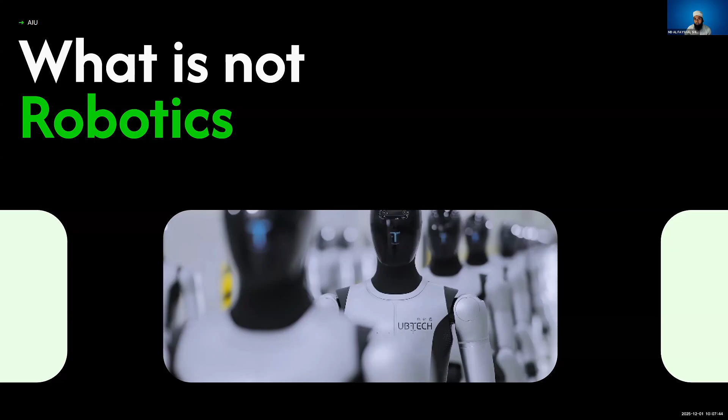So to know how I can share about robotics, you guys need to know a little bit about what I've been doing for the last decade. I was studying at Swinburne University of Technology in Australia, in robotics and mechatronics. From that time to now, it's been almost 9 to 10 years. The first 4 years was me learning, and for the last 5 to 6 years I've been applying what I learned into the real industry.

For the first 3 years, I was freelancing on one of the top platforms on the internet, Upwork. After doing well there, I transitioned to entrepreneurship and started my own startup in the last 3 years. I've been running it, and right now I have a team of at least 10 people. Later you guys can check out my website.

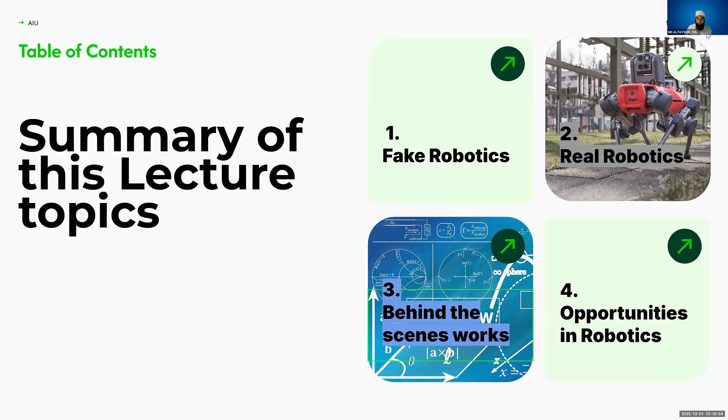So now we can start with the first slide. Most people on the internet are teaching that robotics is a really easy thing. What they're showing is that you just attach a battery to a motor, or some lights or a fan, and there you have a robot. It can be a robot for a different age group—maybe for a 4-year-old this can be robotics, but in truth, that's not robotics in total.

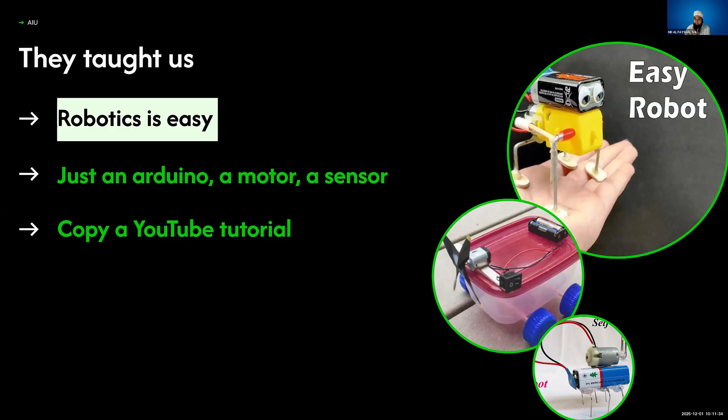There's another misconception that you have an Arduino, a motor and a sensor, and there you go, you have a robot already. Right now there are even universities where students get these kinds of projects, and after achieving one, they think they've already built a really big robotics system. But in reality, it's not.

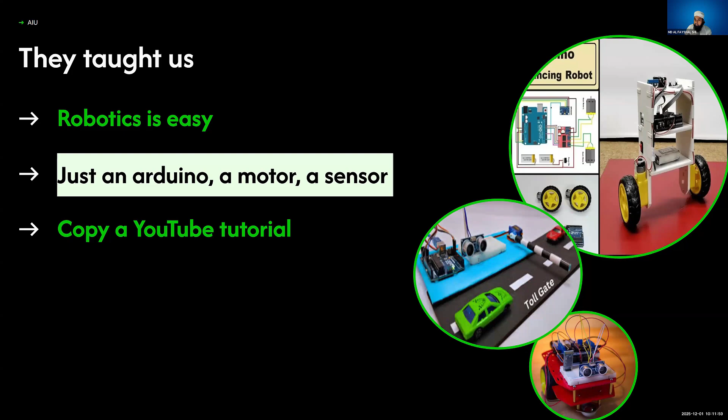Also, there are a lot of YouTube videos available right now, and some people watch this video, and within 2 days they can build what has been taught in the YouTube video.

We almost forget every time that what has been done in that YouTube video was maybe a year-long work, and they simplified it and brought it into YouTube so you guys can do it within 2 days. But that's not going to give us leverage in the robotics business. That might give the YouTuber leverage, but not the viewers.

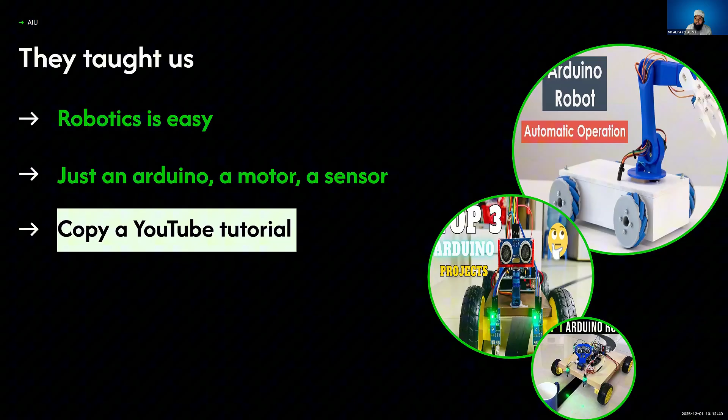So for the viewers, I want to share what actual robotics looks like. This is one scenario, two robots working together. On the left we have two robots, and one of the robots has two arms attached to it, like two hands, and those two hands are catching one bag. Here the robot is using computer vision and also precise grasping ability.

The gripper needs to have precise ability to grasp the bag because the bag is not a solid structure. On the right hand side, you can see the robot trying to flatten and fold a cloth. These tasks may be really easy for a human being, but for a robot, it's really difficult.

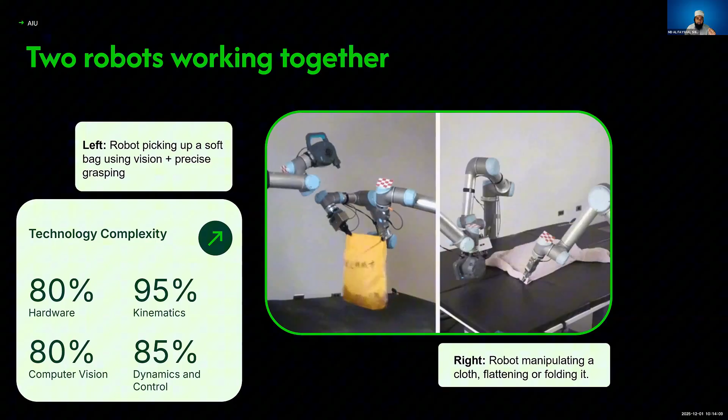On the left I showed some comparison of what kind of technologies are used here, and what complexity of hardware, kinematics, computer vision, and dynamics and control has been done to achieve this feat. If you note that, in the next slides it will just increase significantly. The hardware complexity will change over here, it's almost 95 now. The kinematics has reduced a bit, and the computer vision also reduced, but the hardware has been really complexly done over here.

Watching the video, you'll understand why I'm saying the hardware design is complex. This is not just a normal Roomba robot, or like the factory cleaning robots we know. This one was like a concept at first, and some companies right now are trying to make this thing work. If they want to climb stairs, it can be easily achieved using this kind of mechanism. The work done on the hardware side and the mechanical side of it is really huge, you can say.

So I wrote two or three notes over here. This kind of robot has to navigate the whole house, and that's a really big challenge a robot needs to understand. It's not randomly navigating, it has to be planned navigation so that we don't consume that much battery. So the battery consumption is very efficient.

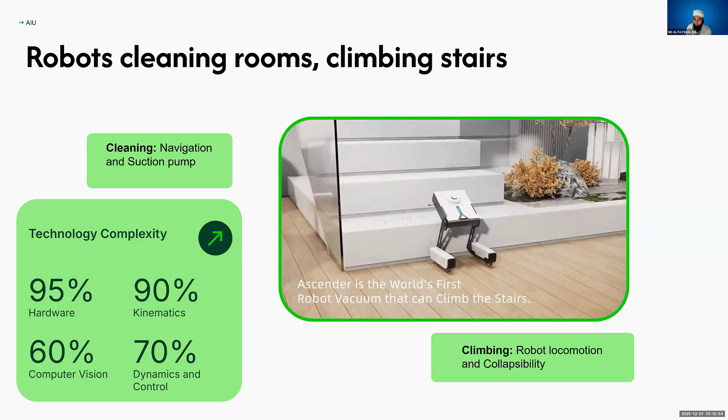When it navigates throughout the whole house, it also needs to store data on where in the house it has the maximum amount of dust and waste. So gradually the robot only goes and spends most of its time on those places rather than the whole house. Like even for our human brains, when we try to understand which part of our rooms are really dusty, we register in our mind that we will go there, and if we clean it, the whole house will be cleaned like 90%. So that has to be fed into the robots by AI and data science.

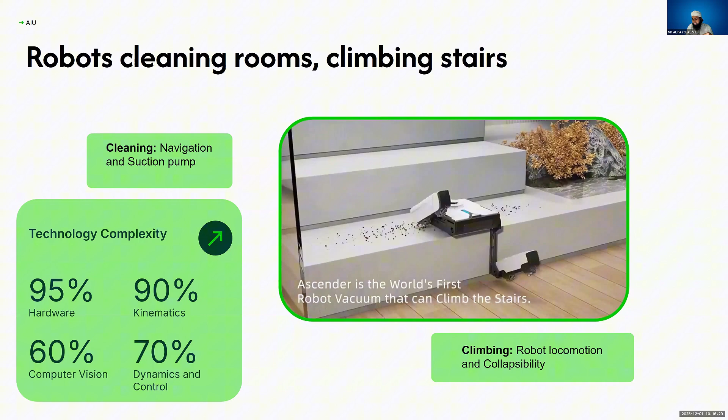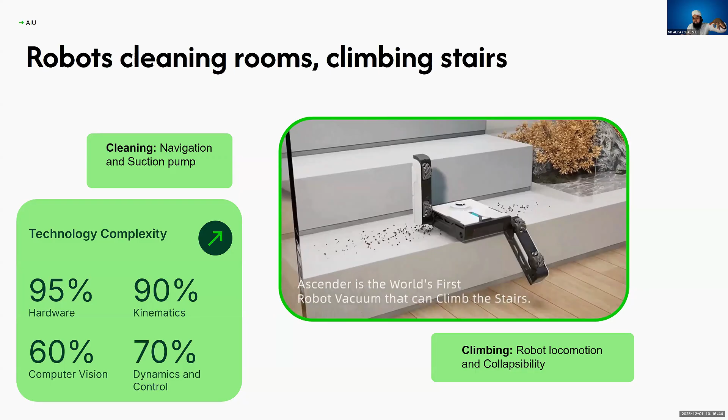For the climbing, you can see that the robot locomotion, the movement of the robot, is really complex over here. A lot of linkage design has to be done for that. It's really collapsible, you can see it's still the size of the Roomba robot, but when it's doing the task, it's trying to be like a giant robot, but in reality it's again collapsing to the original shape.

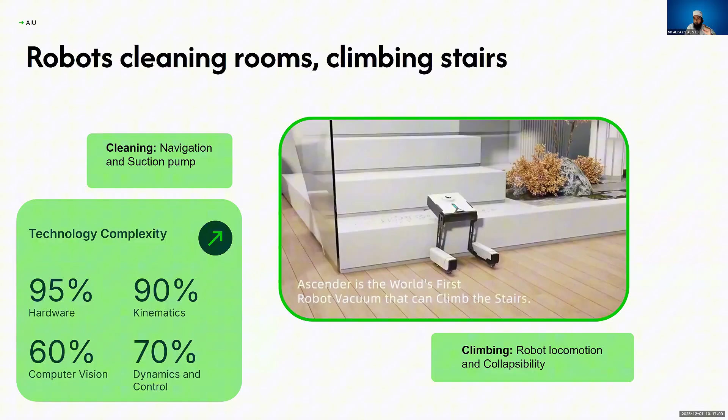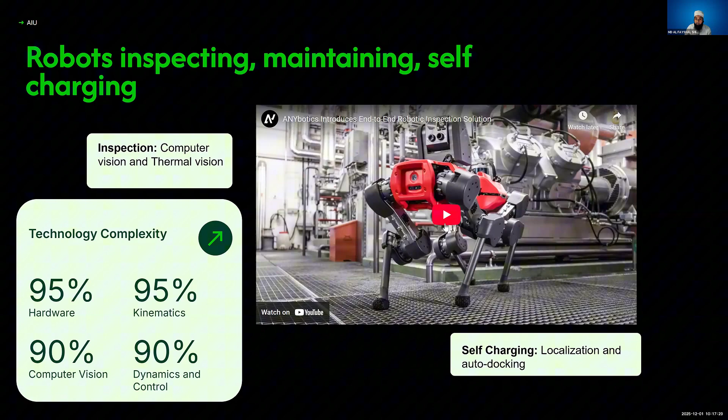The second thing I want to show is about the robot dog. This kind of quadruped robot with four legs is usually called a quadruped robot. In the previous slide, those were moving by wheels, which is really easy to move, but when we're trying to move by legs, it becomes too much high complexity. That's why in dynamics and control, almost 90% of the work has to be done. And here, localization means the robot should always know where it is, and it should go back to its place for self-charging.

I'll just play the video shortly so that while I talk, you can understand how complex tasks this robot can do.

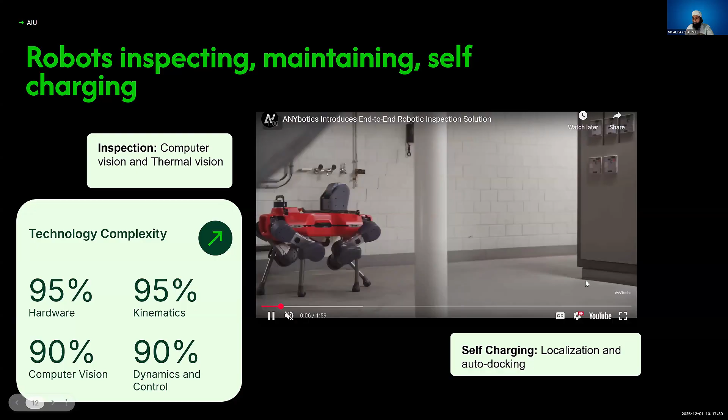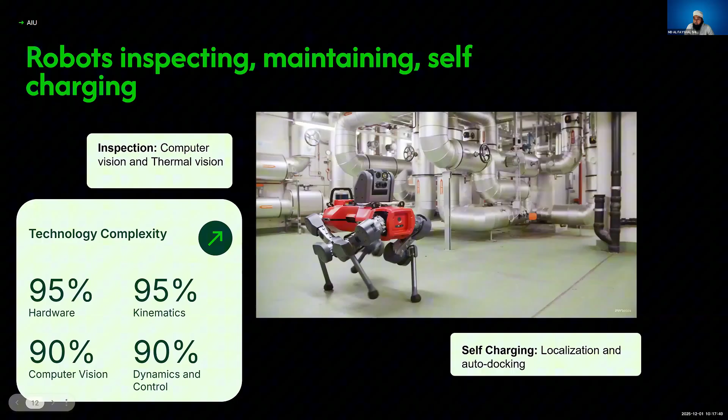Usually, this robot is planned to be used in industries where human inspection is obviously not enough.

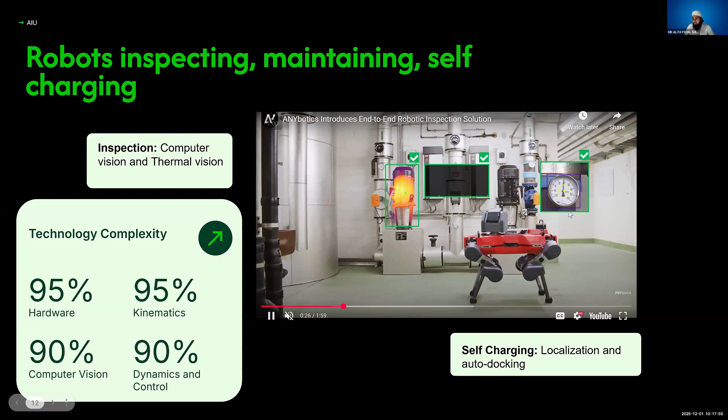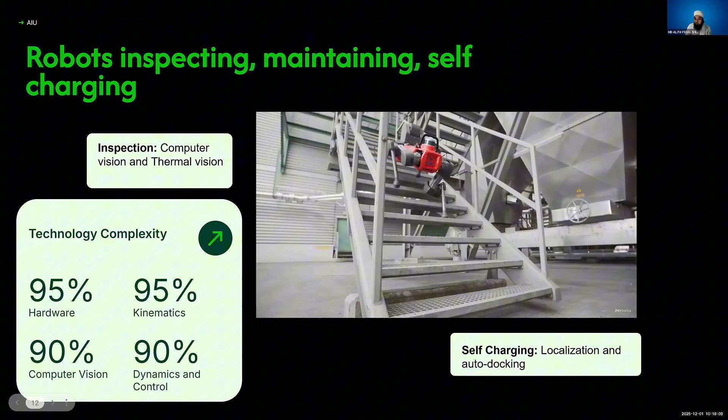This kind of robot can see, you just saw it has heat vision and it's checking if everything is correctly placed or not. If there is something wrong, then it can send a signal back to people within the premises, and they will come check and maintain the hardware.

You've seen it can also maneuver the stairs easily. For the previous robot, it was really difficult to maneuver the stairs, right? But for this robot, it's nothing. So some robots get an advantage in some areas, while other robots get an advantage in other areas.

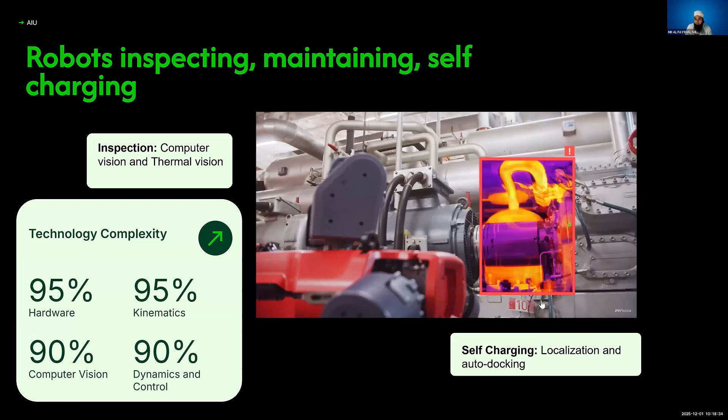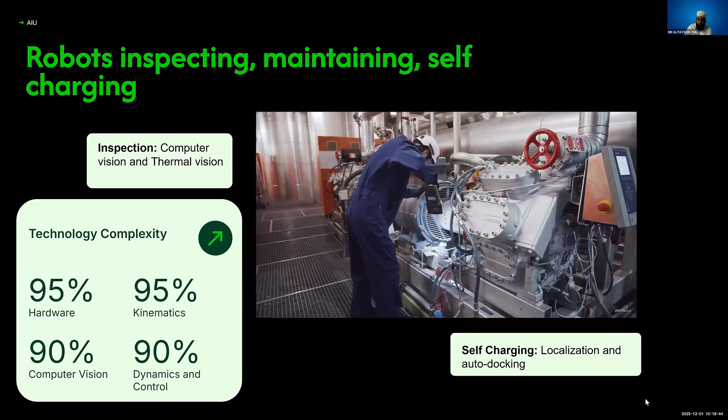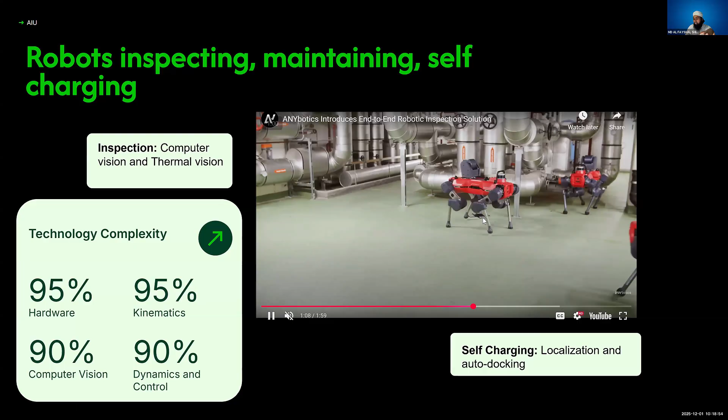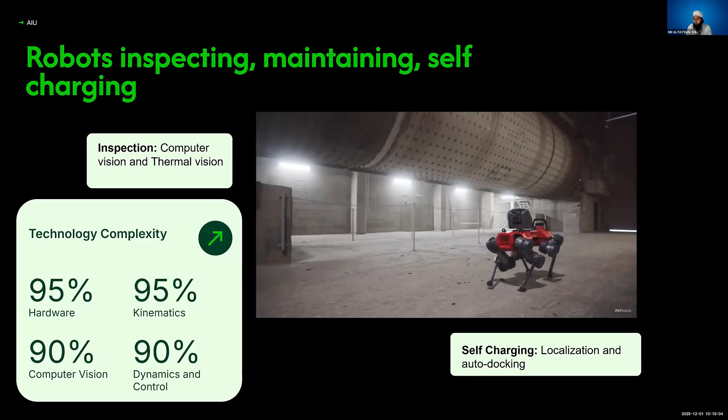Here you can see these robots coming back and trying to self-charge. This is like a docking station. After they are self-charged, they go back again and work endlessly, which a human being will not be able to do. In countries where there is a human worker shortage, they will try to utilize robotics more than anything.

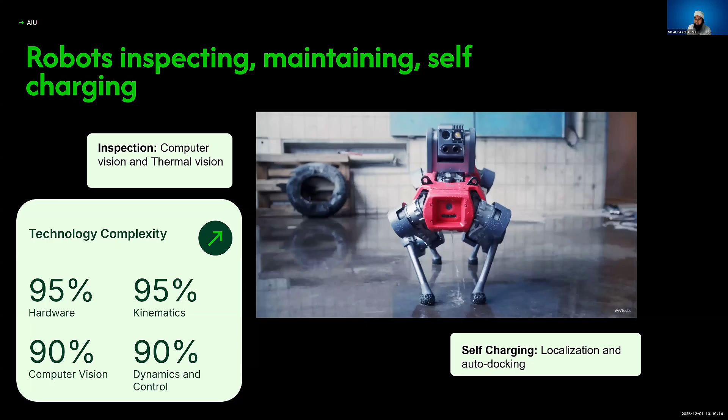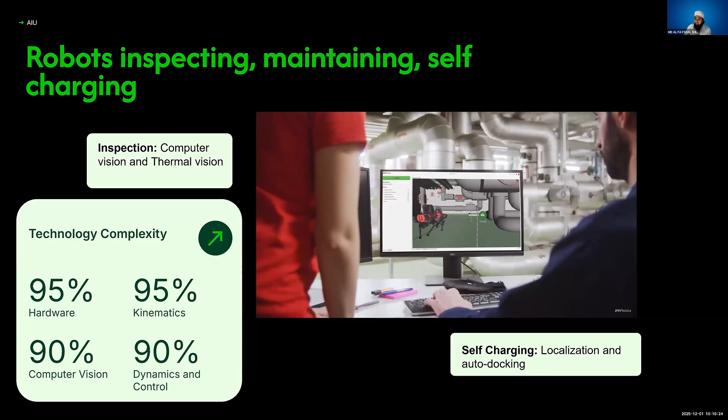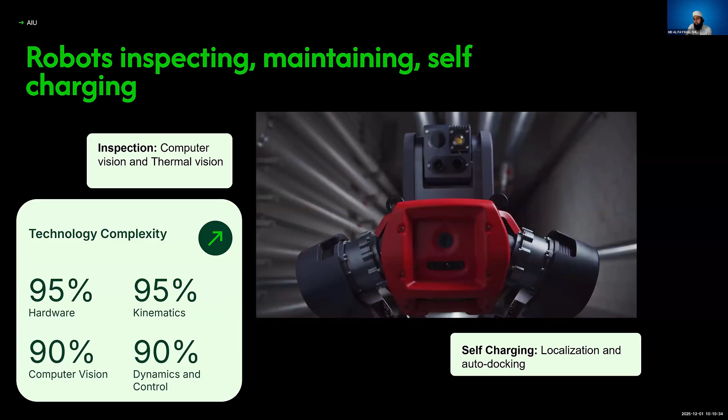There are even other benefits, like these robots can give real-time data, and that data isn't just given, it's directly stored. Over months and years of knowledge, the industry will learn what problems we are facing daily and how we should change our engines or our whole machines so that we don't get these kinds of problems again. A human being might register that, but we don't necessarily understand the long term game of the whole industry.

That's why we fail to register things, and we don't usually give that much feedback. But the robot will give continuous feedback.

Right now, what we do with ChatGPT is just talk with it and try to get some advice from it. But in the future, when robotics merges with these AIs, the robots will try to understand what we are saying to them, and they will try to do the task with those prompts.

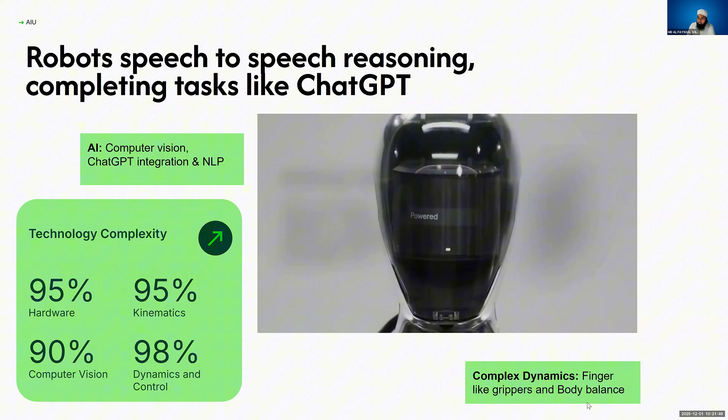Hey, Figure One, what do you see right now? Thank you. I see a red apple on a plate in the center of the table, a drying rack with cups and a plate, and you standing nearby with your hand on the table. Great, can I have something to eat? Sure thing.

Great, can you explain why you did what you just did while you pick up this trash? On it. So I gave you the apple because it's the only edible item I could provide you with from the table.

Great, so based on the scene right now, where do you think the dishes in front of you go next? The dishes on the table, like that plate and cup, are likely to go into the drying rack next. Great, can you put them there? Of course.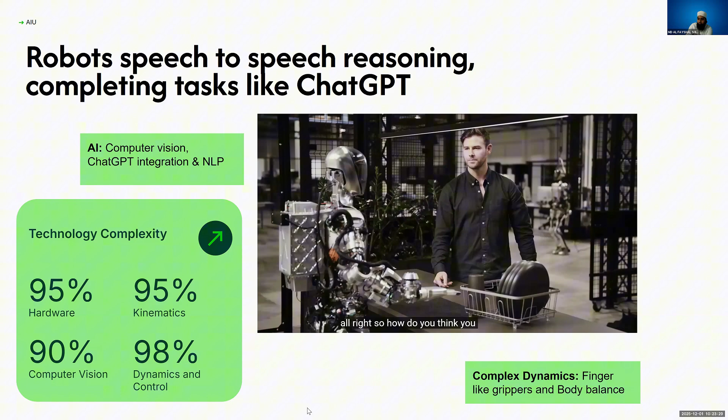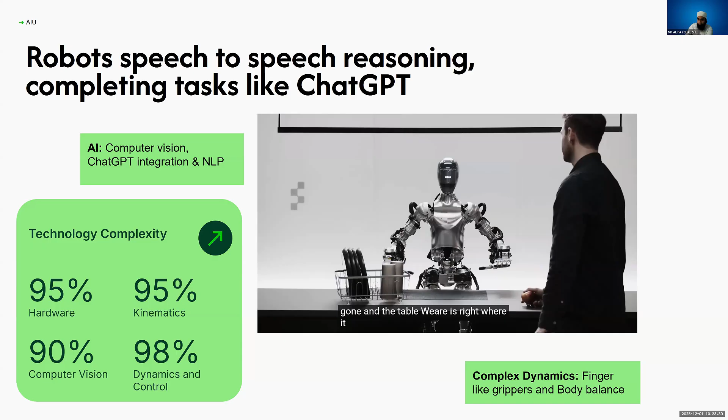So, how do you think you did? I think I did pretty well. The apple found its new owner, the trash is gone, and the tableware is right where it belongs. I agree. Thanks, figure one. You're welcome. If there's anything else you need help with, just let me know.

This video will give everyone a bit of understanding of what kind of complex works can be achieved by robotics. Although robotics is not that easy, that's why robotics researchers always say it's taking more time to bring robotics to the stage where everyone wants.

But for AI, it was really easy. AI is working itself to develop its generative ability, meaning AI is working to make itself better. But robots can't do that because they're physical and have a lot of physical constraints.

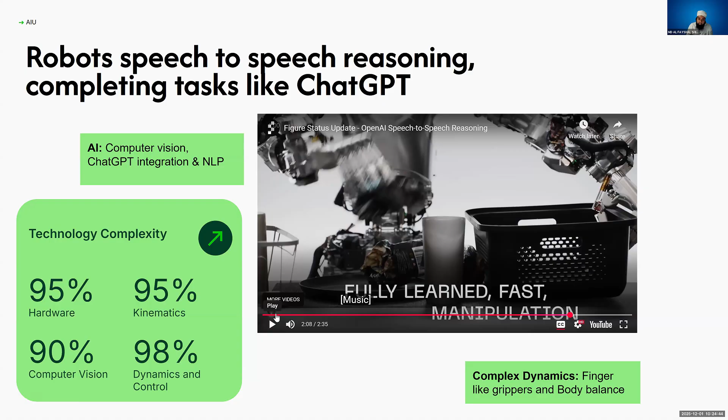So there are a lot of things we need to take care of if we're trying to develop a robot. Just like this robot, there are a lot of different robots that will be developed within the next 10 years, and robots will get into our lives just like smartphones did.

It's a very big bet that a lot of people are taking, for the reason that robotics will become cheaper. That means getting or buying a robot will become more affordable, and people will start buying robots more. These robots can solve a lot of general tasks that we usually need a person to do.

Obviously, that's a question then - what will people do if all of our work has been done by robots? So there are a lot of debates going on around this fact, what we will do if everything has been done by robots.

For years, we've been getting the same answer: we'll do more engaging activities, or activities that make us more delighted and thrilled, and we'll do things that matter the most. We'll spend more time with our families and work a little less. But I don't know, that's what I've been hearing, but it's very hard to predict the future.

Right now, if you see how we're using smartphones, smartphones can do a lot of things, but it's very hard to say that smartphones have 100% made our life easier. On one end, it's making life easier. On another end, it's making a lot of things more difficult.

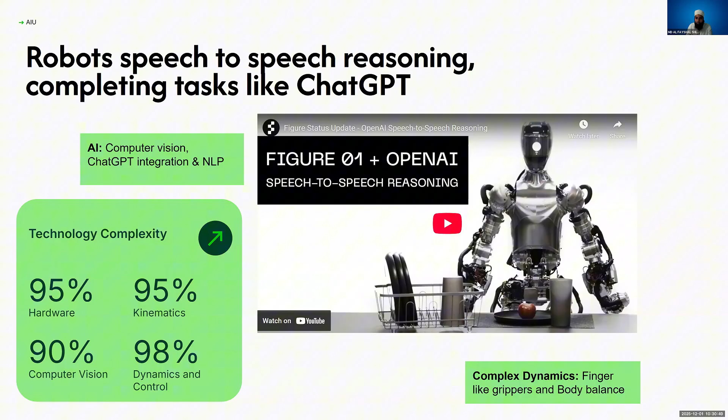So the third thing, a very big challenge, is sensor reliability. What is a sensor? We have a lot of sensors in our human body. We can sense touch, we can sense if there's anything in front of us - that means our vision is also one kind of sensing machine. When we taste something with our tongue, we can understand its taste - that's also a kind of sensing machine. There are a lot of sensors.

Remember, when we have a fever, it's very hard for us to understand if something tastes really good. You can understand that when we are sick, we are not able to tell if a dish tastes really well or if it's tasting a bit bitter, because at that time our tongue sensors aren't working. In the same way, if one of the sensors of a robot goes wrong, the whole robot will have different actions for different kinds of prompts. That means I will ask it to fetch the apple, but it will fetch me a ball. So that's why sensor reliability is very important.

The last thing, since we're talking about hardware - cable routing is a really big problem, because even in our small offices, if we have cables laying around us, we feel really annoyed. So we try to manage those cables, try to hide them so we don't feel overwhelmed. In robots, that's also a really big problem because a lot of sensors, motors, and power supplies are used. While giving all these connections, we need to make sure we can hide these cables so we don't see the ugly parts of robotics hardware.

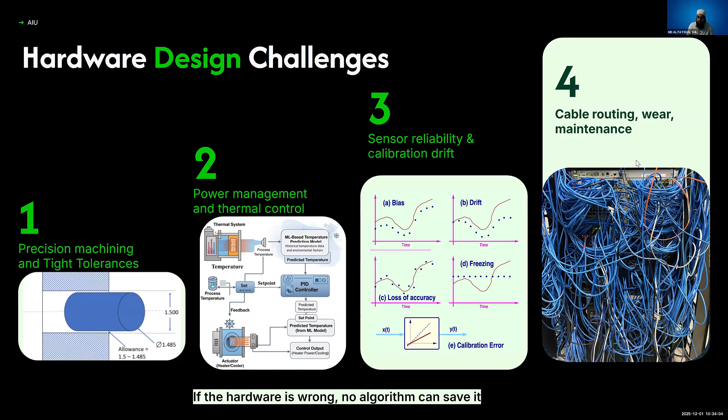So the next slide is kinematics and mathematics challenge. Now here things get more academic, and that's why people actually need a really big degree to be an engineer, where they need to start from engineering maths, trying to understand the mathematical complexity of each machine.

And since these machines are moving machines, it's not like a static machine, there is a lot of motion tracking needs to be there while we are just calculating with mathematical equations.

So one of the most difficult parts over here is what we call inverse kinematics. When we were in our third year, I remember that was one of the most challenging things, and we somehow passed that subject because it had a lot of complex maths and also dynamics and mechanics.

included within robotics, and so we faced a really big challenge over there. So the first one, what I am saying is inverse kinematics, what does it actually mean? Let's say this is my hand, and this hand is a robotic arm. And if I try to pick something, I need to know what is the location of that object.

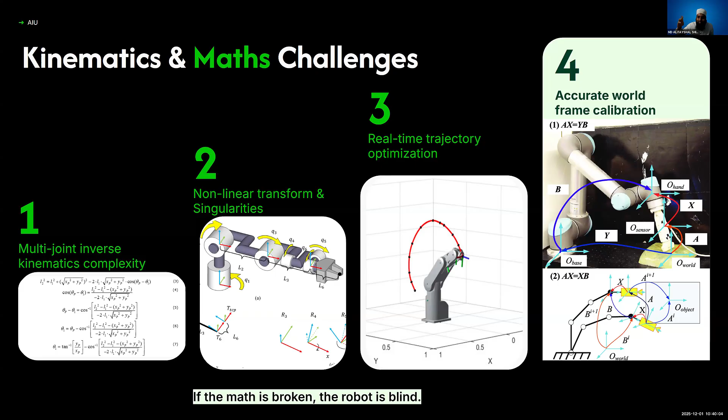The third and most important part is dynamics and control. I had a lecturer, now already a professor, who used to always say that the most important and most difficult part to solve is dynamics and control. Why is it more difficult? It's not only mathematics.

Now you have to combine the mathematics with a lot of computer coding skills. People sometimes use MATLAB for it, and right now people are using other software. ROS is mostly used now for understanding robotics, navigation, or manipulation problems. Here I will show some challenges. The first challenge is modeling.

The first one is modeling friction, inertia, and backlash. There is a lot of friction, and we usually try to avoid it. We guess, let's say the friction is zero, and start our math from there. But in the real world, we won't be able to do that. We have to take into account all the physical constraints like friction and any noise that's in place.

There is also inertia and backlash. Inertia is very easy to understand, it's one of Newton's laws: if an object is at rest, it will resist going into motion, and if it's in motion, it will resist stopping. These things are also present in robots, which is why we need a minimum amount of power to start with.

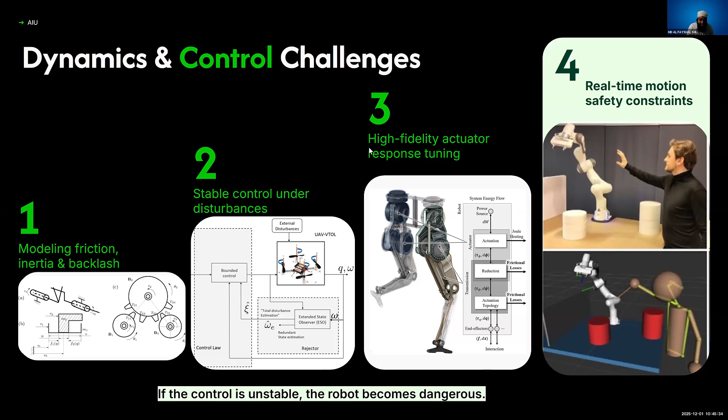And lastly, the software and AI challenge. Right now, everybody is familiar with AI. So there are some similarities with the AIs that we are using right now and the AI that will be inside the robots. But in robots, there will be a lot of different challenges. One of the biggest is that in software, like in ChatGPT, whatever we are writing, the software gets that feedback.

Some of the robots are trying to have night vision cameras as well, so that they can operate in darker environments. And the second one is a very big one.

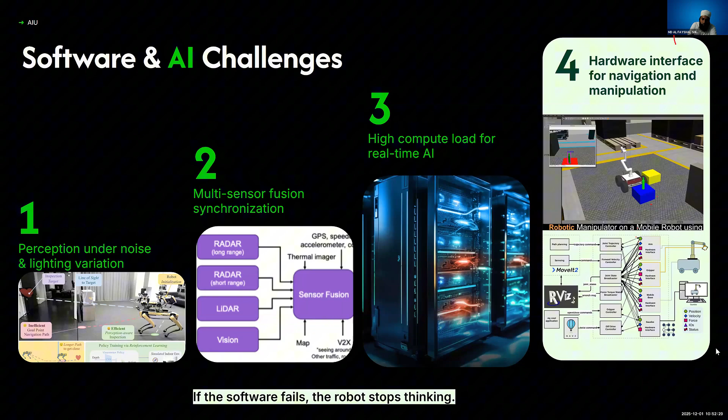So the tough part ends here. Now I'll show something easier. The lecture is almost over, so let's take a breath and first digest what I have already shown. So here in this slide, what I'm showing is that...

A lot of people are trying to forecast the future. Nobody knows what the future has, but people are forecasting - some to promote their own growth or their company's growth, but some are giving predictions based on data we've seen over the last 50 or 100 years. Now we have AI models, we can talk to AI models, and nobody can directly fool us by giving just a number, right?

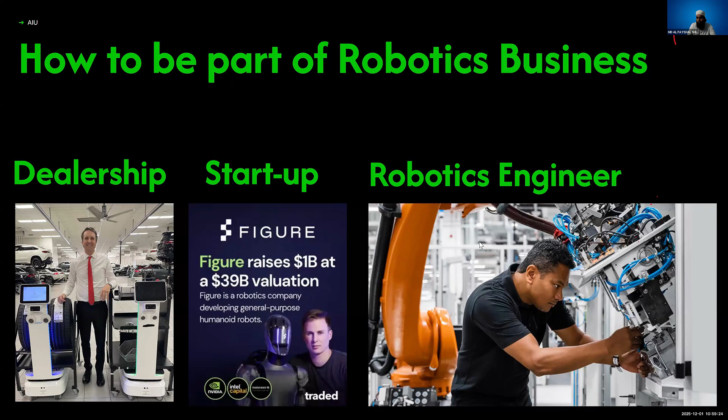When I was reached out for this lecture, the slides were already almost 60% there, so I told them it won't be difficult for me—I can take the lecture and show what we can do to be part of this robotics industry.